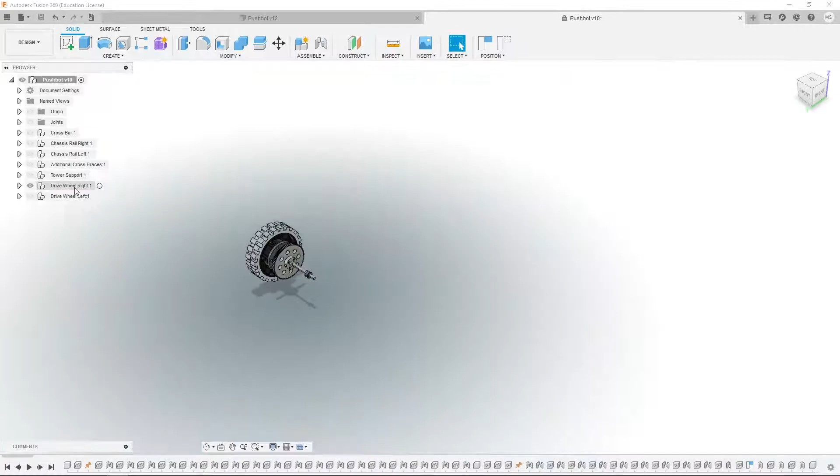I'm going to turn off everything but the drive wheel right. I'm going to make drive wheel right my active component, and inside the drive wheel right, I'm going to make invisible everything except for those two AndyMark pieces, just to make this easier to see what's going on.

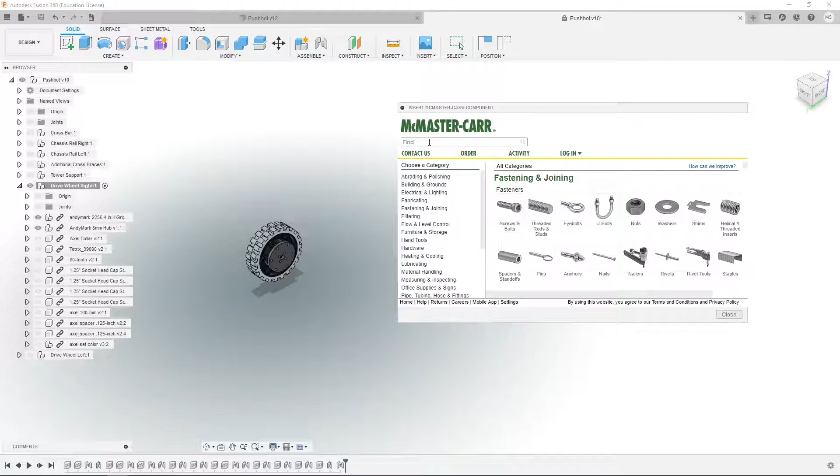Okay, to bring in a part from McMaster-Carr, we're going to click on Insert, the top menu bar, and Insert McMaster-Carr Component. This will open up the website from McMaster-Carr, and what we want is a screw. So I'm going to use the search to find a screw. Now the thread size of the screw I'm looking for is 10 by 24. So under thread size, select 10 by 24.

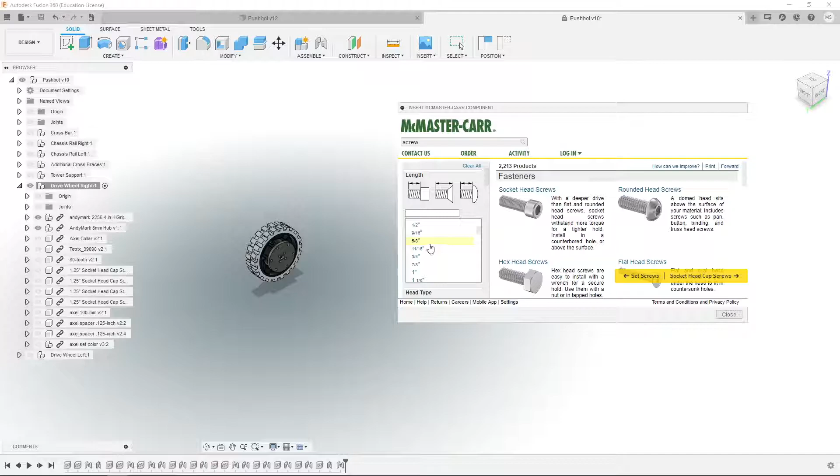Next, it's asking me for the length of the thread portion, and that is 3/4 of an inch. So I'm going to scroll down until I find 3/4 of an inch. I'm going to grab that one. And the type of screw I have, and I already have these in the room, but I'm just finding them to add to our model, is a hex screw.

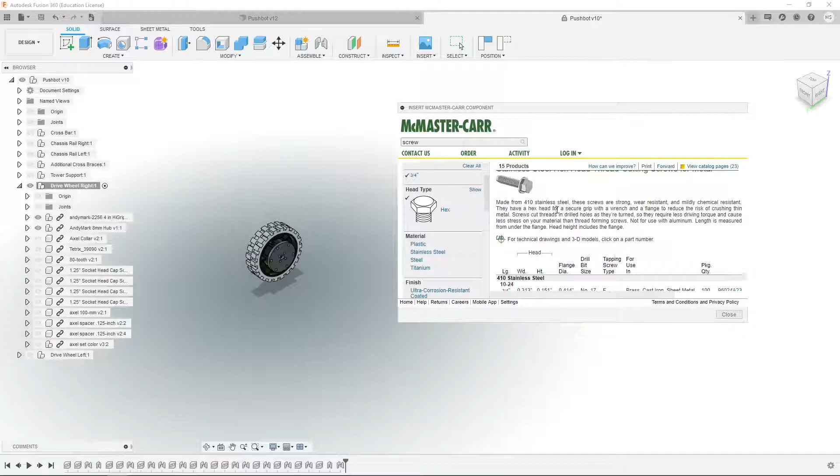And then if you scroll down nearly to the bottom, I believe it's the second to the last one. I know these are for cutting metal. They are thread cutting screws for metal, but they work just fine in the plastic. I tried them out. We scroll down until we see the package number there. So it looks like we can get 100 of them, I believe, for about $10. Let's see. Yep. About $10 for a package there.

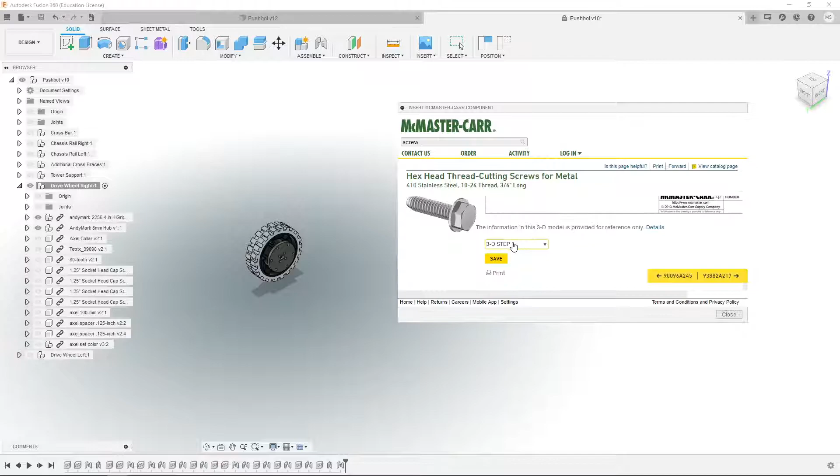If you click on product details, that will bring us to that particular screw, and the details, if we look down below, we have 3D models here. Now the default is SolidWorks. We want the 3D step file. So just below SolidWorks, make sure that says 3D step, and then click on save. That is going to bring that piece into our project.

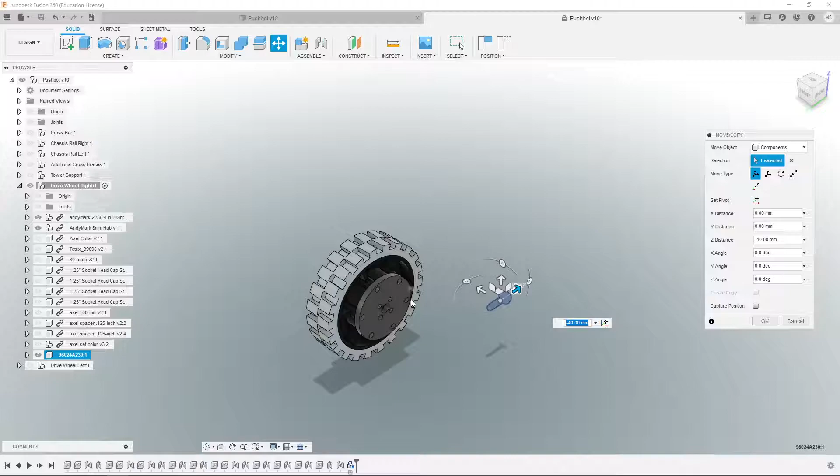I'm going to rotate that over 90 degrees just so it's easy to see the shaft there. Let's bring it down a little closer to where I'm working. And I want to make 2 more of these. I'm going to go every other screw hole here and put a screw in there. Make sure it's definitely on there. So joint, we're going to capture that position, creating a joint between the shaft of this.

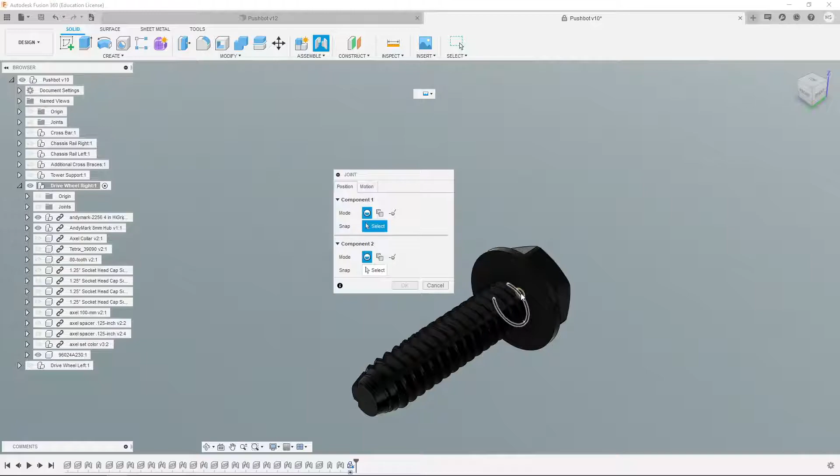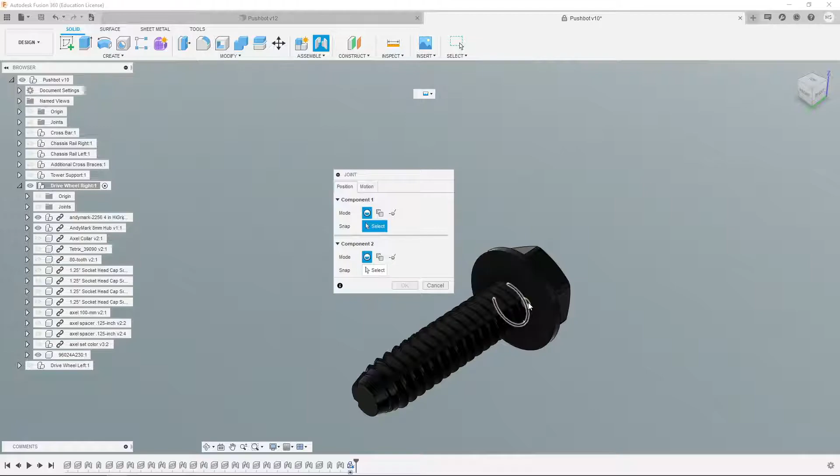What's really cool about these McMaster-Carr parts is that they also have the threading in there. If I wanted to 3D print this, it would print with the threading. A lot of times when you're making something in Autodesk Fusion 360, it will default to a skin of threading, but the shaft will still be smooth. Here, they actually have that threading in there. So you can't grab those threads. What we need to do is grab the underside of the head of the screw and then that inner ring.

Okay, and then let's insert it into one of these upper holes here to attach it. And of course, we need to flip that over. There we go. It's exactly what we want. I'm going to cancel out because I haven't made my copies yet. So let's go ahead and make our copies. Copy. Going to paste one in there. Try to capture that position. There we go. Copy. Let's paste in another copy. So we've got 3 copies.

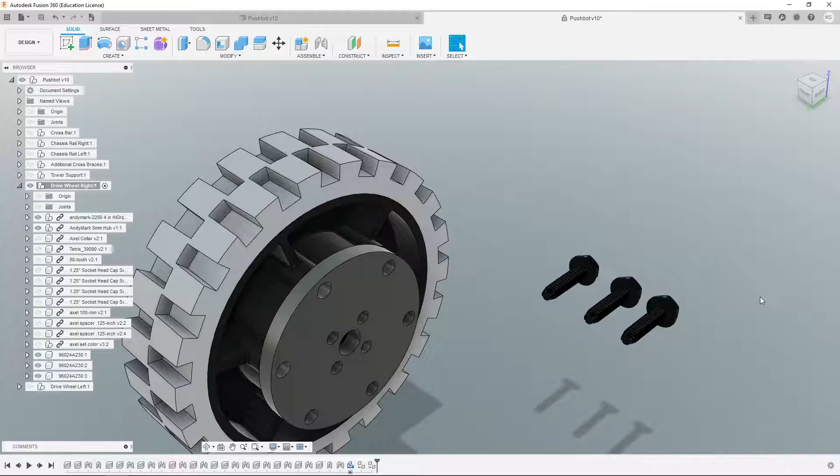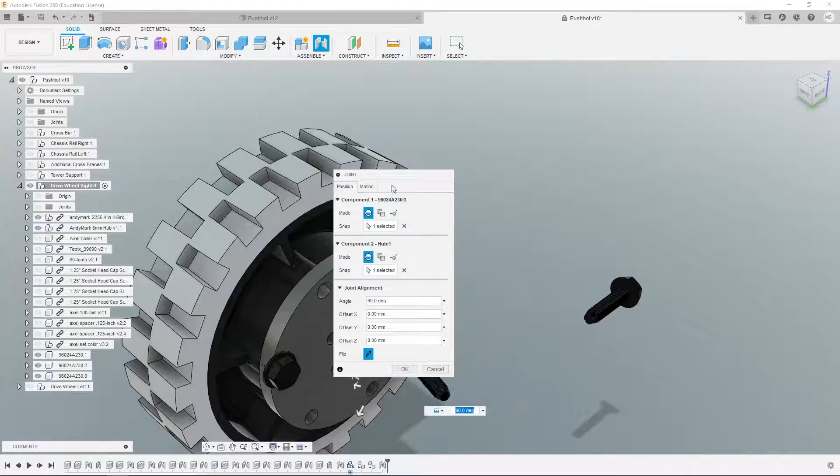All right. Now let's go ahead and join those using our joint tool. Inner ring of that head. There we go. And we're going to place these so they are spaced every other hole there. Our joint tool. Inner ring there. Every other one there. Let's move this out of the way. Flip that around. Very good. And last one.

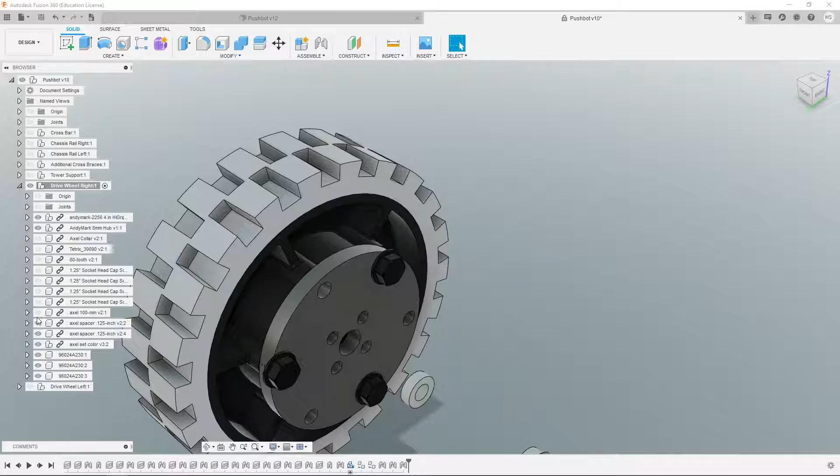Okay, so those 3 screws are in there now. Let's turn on the pieces. Make sure there's no interference. Great thing about building this virtually is that you can see if there's any interference or not before you build it in the real world. That looks perfect. Very good. Okay, let's turn on the rest of the components.

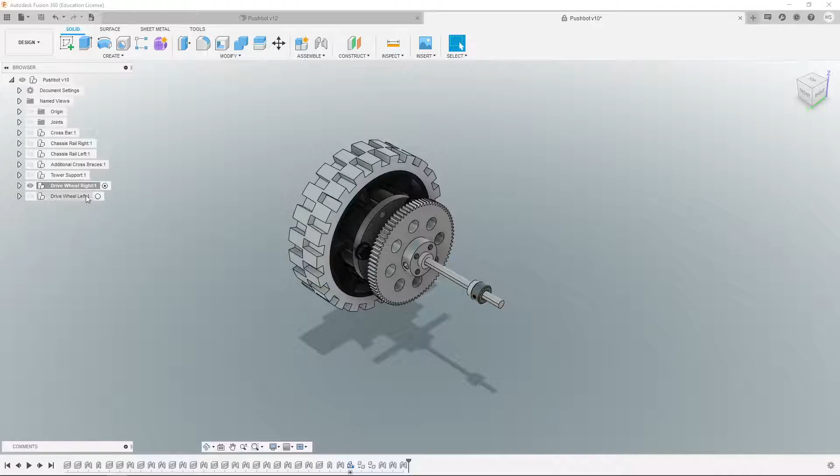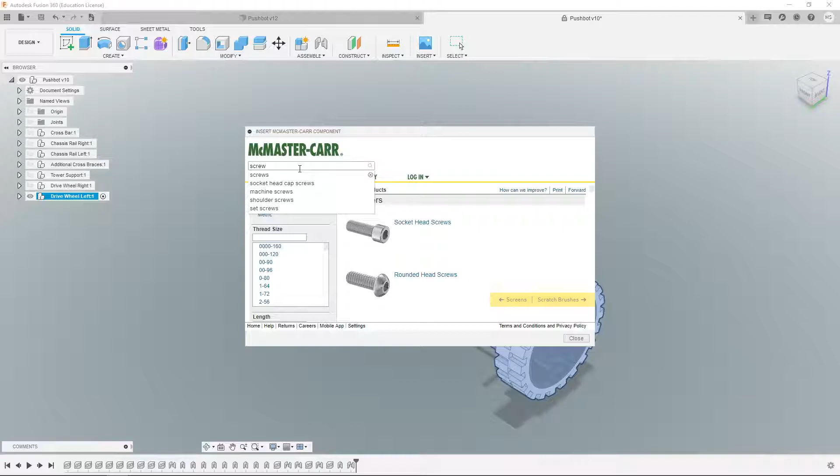Exact same process for the drive wheel left, make sure you make that your active component, and then you can go ahead and bring in those screws from McMaster-Carr. There it is. I'm going to go up here to Insert McMaster-Carr component. Again, we're looking for a screw. Thread size is 10 by 24. The length is 3/4 of an inch. Hex for the head type. And then scrolling down, second from the bottom is the screw that we want.

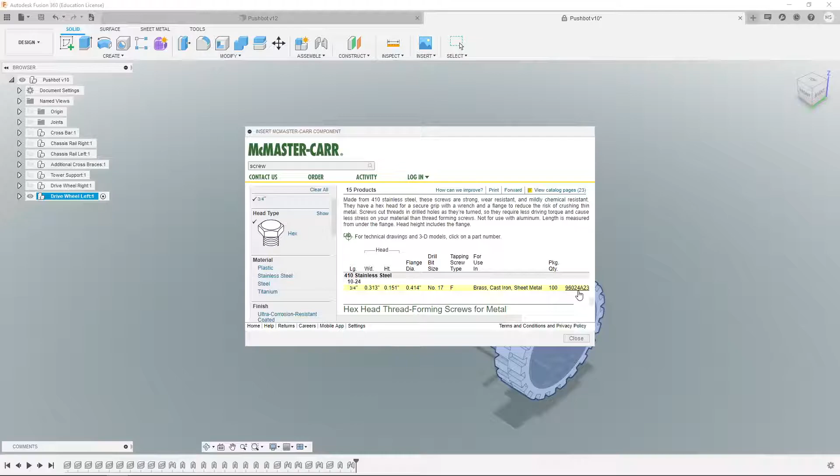And that product number, if you just want to put in the product number, is 96024A230. Product details, scrolling down to the bottom, selecting 3D step file and save. That's going to bring it into our workspace.

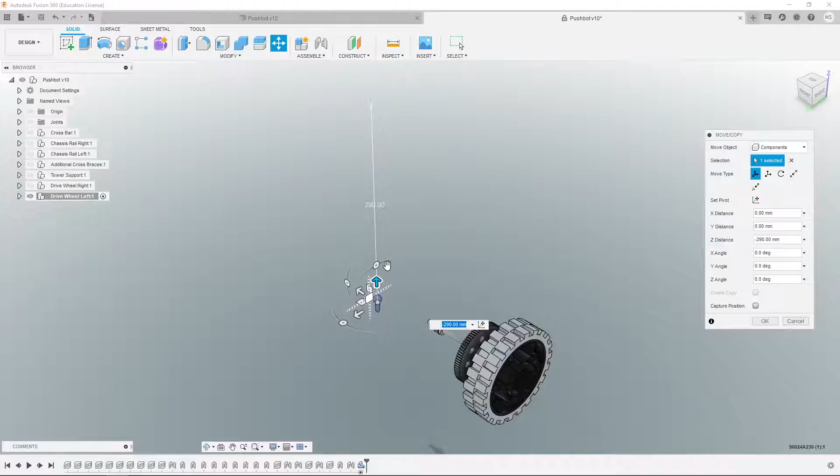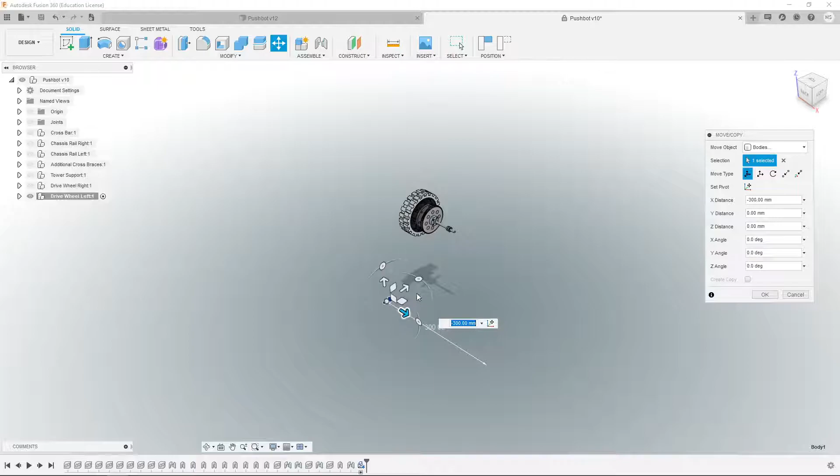I'll rotate this 90 degrees the other way. I'm going to switch my view around here in just a moment. Make this easier to see. Okay. Go exactly opposite on that cube. Where did the screw go? Let's go ahead and move that closer to my work area. That looks a little better right there. Okay. And under drive wheel, I'm going to turn off everything except for the screw and those AndyMark pieces. And then I'm going to make 2 copies.

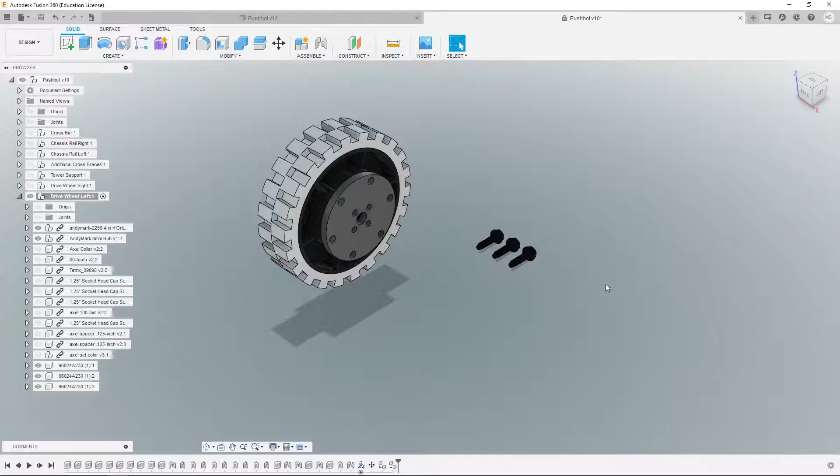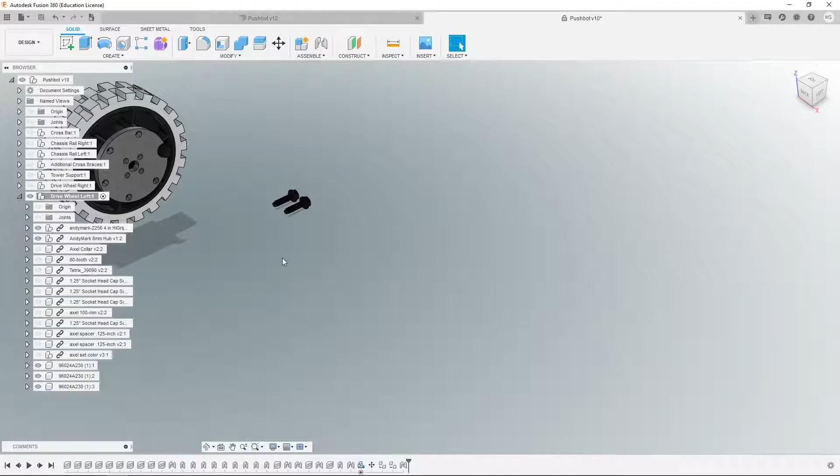The screw copy, Control V to paste, making sure to capture that position. One of them, Control V again to bring in a third. Okay, let's make those joints. I'm going for that head and the inner ring of underside of that head. There we go. Oops, zoom back out. There we go. It's a flashy animation there. I'm going to pan back over. I've lost the center. There we go. Escape from using the pan tool.

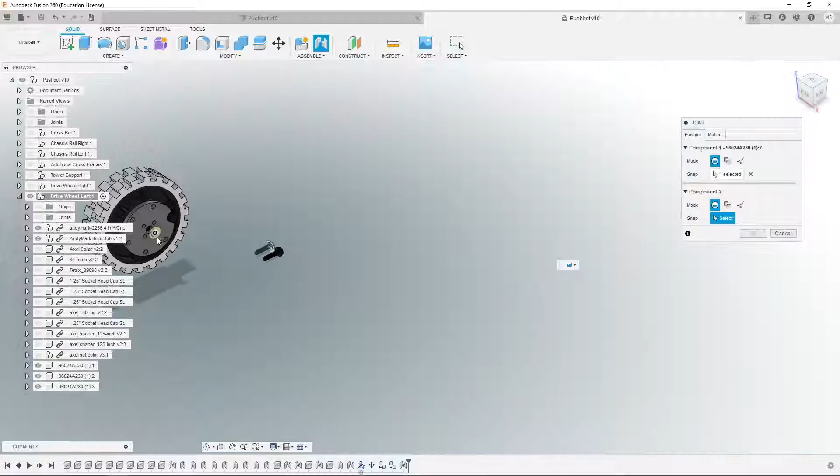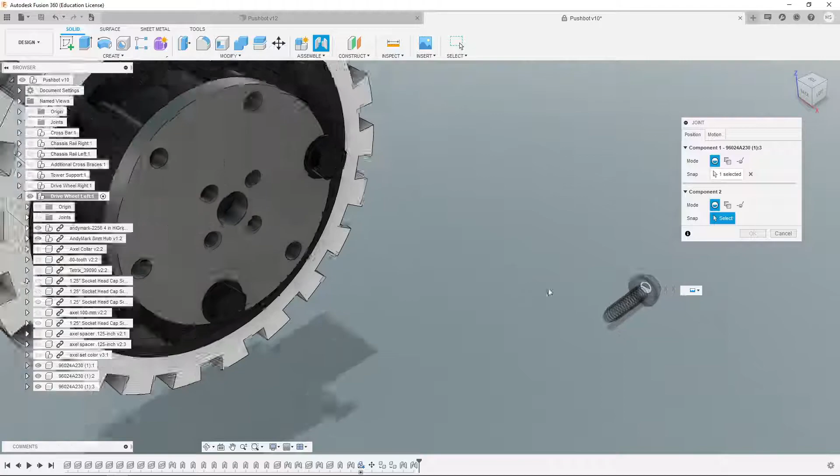J for the joint tool. Zooming into the inner loop of that head. Oh, there it is. It's not cooperating. There we go. That's a flashy animation. Look at that. Panning back over again one last time. Escape out of using pan tool. J for joint. Inner circle of, there we go. Underside of that head and last screw in place. Okay.

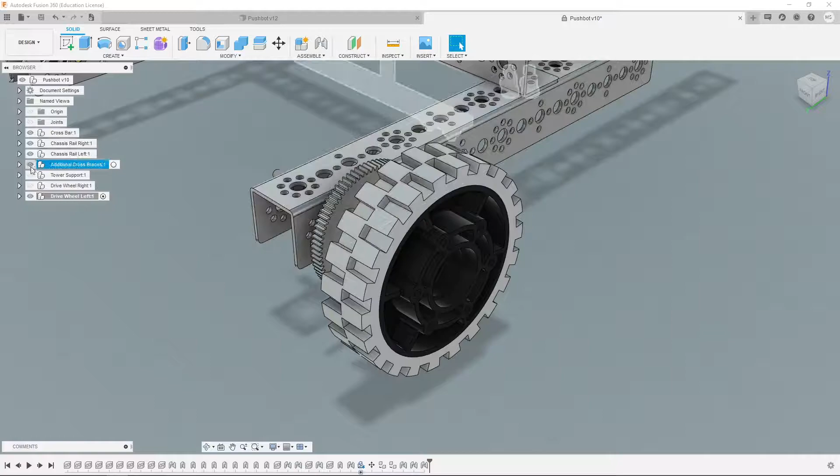I'm going to turn everything back on and take a look at the results. And there we go. Those McMaster-Carr parts are in place.